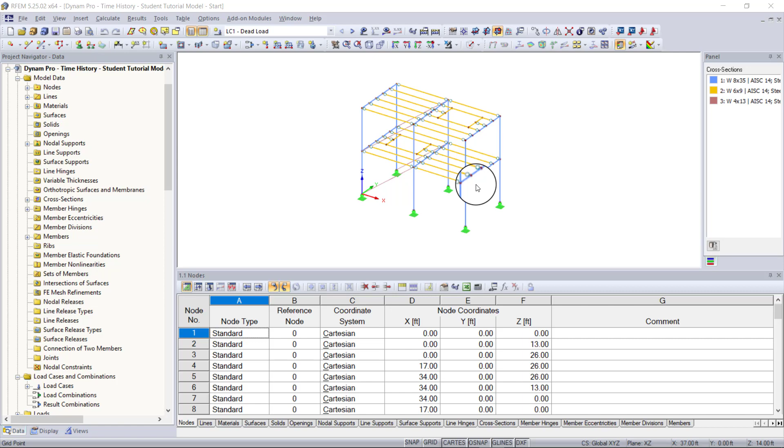So first thing you will see is I have a simple steel frame structure open here. And this is what we are going to be placing our oscillating machine on. And we will be adding in the horizontal and vertical force load cases as well. So now I just want to show you the machine load.

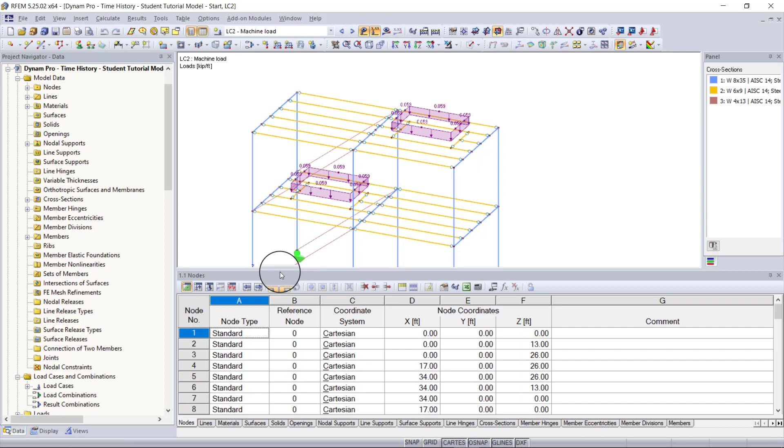Right now we have the dead load open, but if I go to the machine load, you can see where the machine is placed within these openings here. And this is basically just a static force. So now what we need to do is add in the radial forces. So we need to go up here and create a new load case.

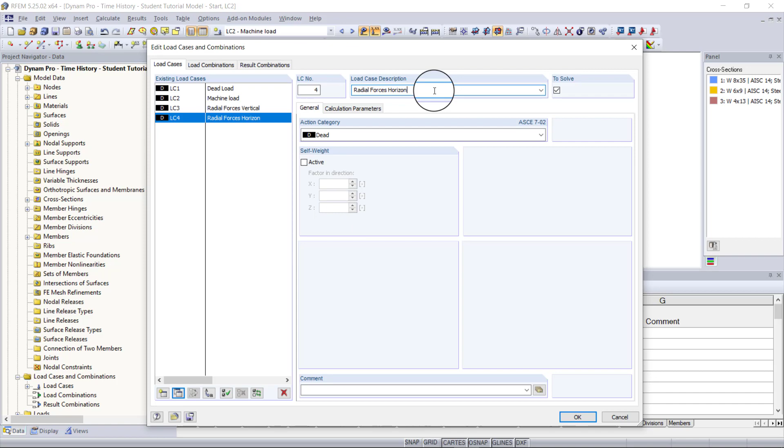The new load case dialog box will pop up, and this first radial force will be our radial forces in the vertical direction. And then we just need to create a copy of this and have a load case specifically for our radial forces in the horizontal direction. So we'll click OK. Now what we can do is we can create our vertical radial forces.

So what we need to do is go up to new member load. And then we can create our new member load, and this is going to be a force uniform and in the Z direction. And then we're going to enter a magnitude of 0.05 kip per feet. Click OK. And now we can just add in the forces along the perimeter of this opening where our machine is located.

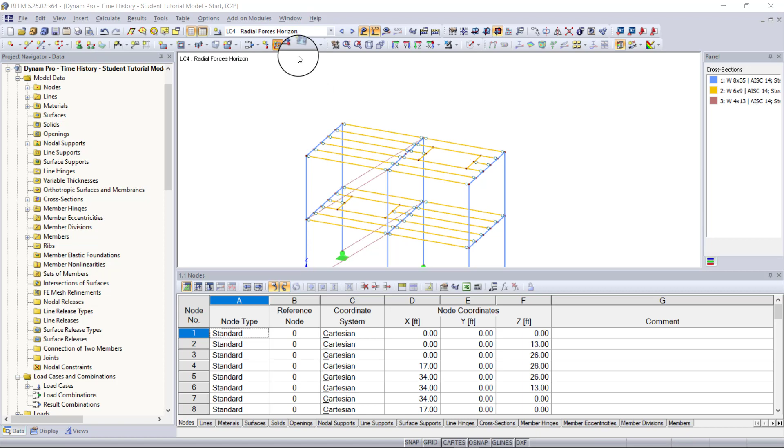And now all we need to do is do the same thing for our horizontal forces. So we'll go to the horizontal load case and create a new member load. And instead of being in the vertical direction, this is going to be in the X direction. And this is going to be the same magnitude, so 0.05 kip per feet. And so now we just need to add in this load.

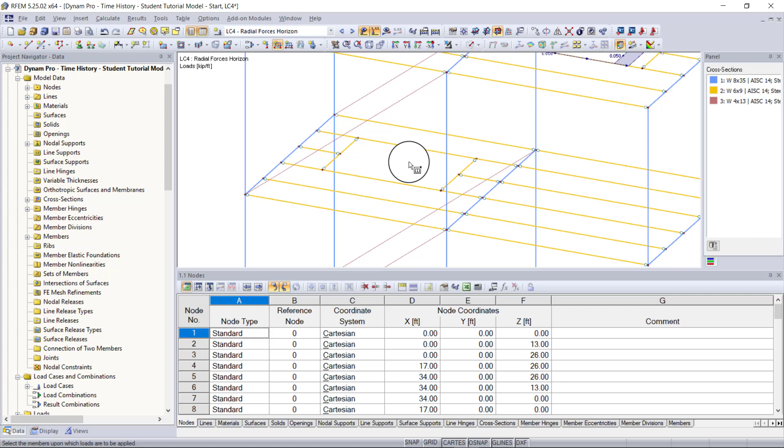And we can do the same thing for our opening down in the bottom here. And now we have both of our horizontal forces and our vertical forces. So now that we have our forces for our machine, we can go into our project navigator on the left-hand side here and go down to add-on modules, and then we can double-click on RF-DYNAM Pro Dynamic Analysis.

So now the first thing we want to do once we have the RF-DYNAM Pro add-on module open is we want to activate natural vibrations and our mass combinations.

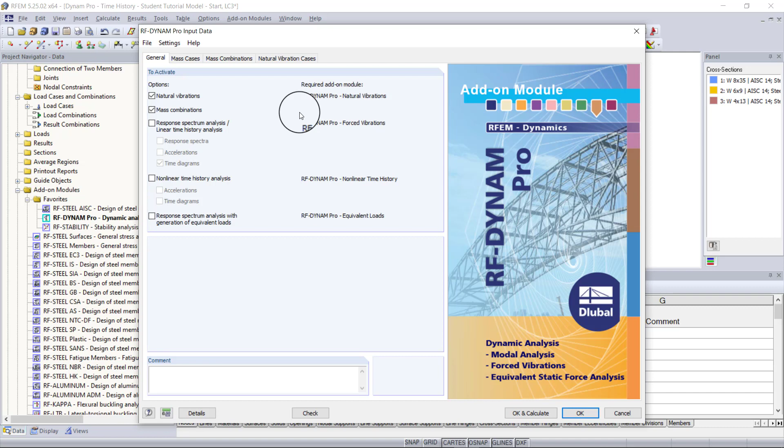So under mass cases, we want to create two mass cases, one for our machine load and one for our dead load. So we'll just make this first mass case our dead load. And since we're already taking self-weight into account in RFEM, we're going to turn off self-weight. And then we're going to check off the option to take the force components from our LC1, our dead load case.

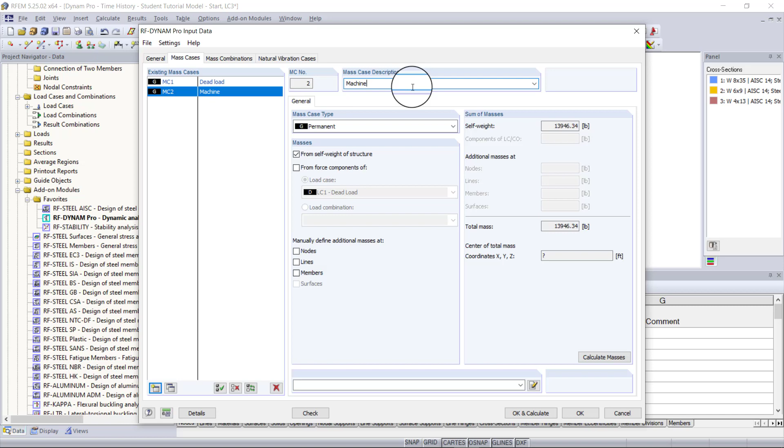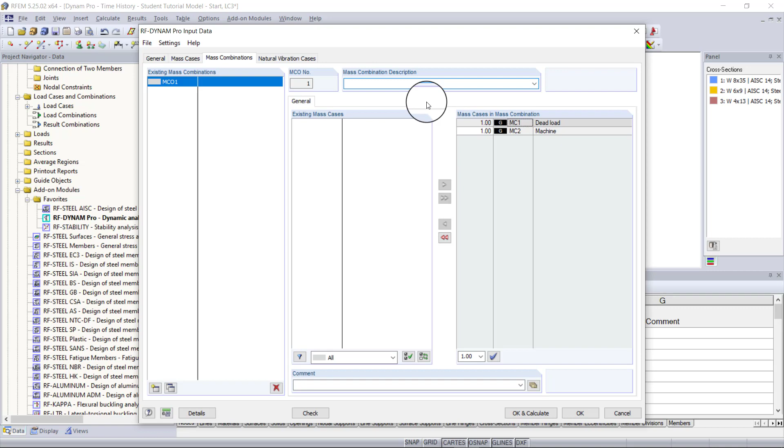And so now all we need to do is just make another mass case, and this one will be for the machine. And we're going to uncheck from self-weight structure and from force components, and then we're going to choose our load case machine. Now under mass combinations, we just want to combine both of our dead mass case and our machine mass case over. So we can highlight both of these, move them over, and then we can just name this mass case 1 and leave it blank.

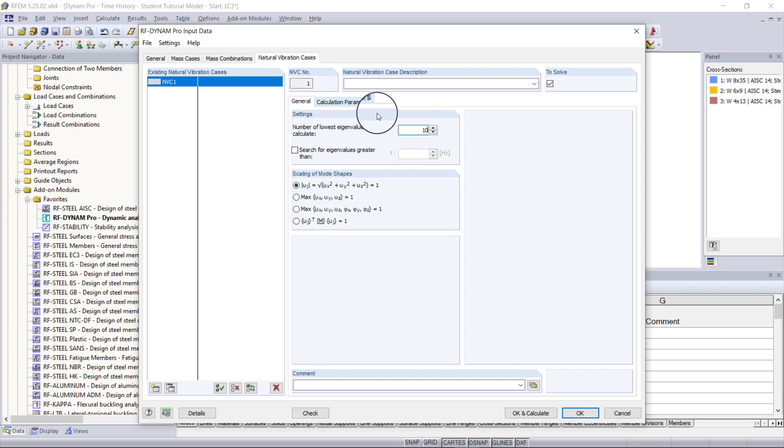Next, under our natural vibrations case tab here, under our general tab, we want to tell the program to run 10 eigenmodes. And then we can leave our scaling of mode shapes equation the same here. Then under calculation parameters, we want to choose the acting masses from our mass combination.

And then we are going to keep all three directions activated. And then we just want to keep our diagonal matrix and translational degrees of freedom. We'll keep the method for solving our eigenvalues as default as the Lanczos solver. And then we don't want to take any stiffness modifications into consideration. So now what we need to do is hit OK and calculate.

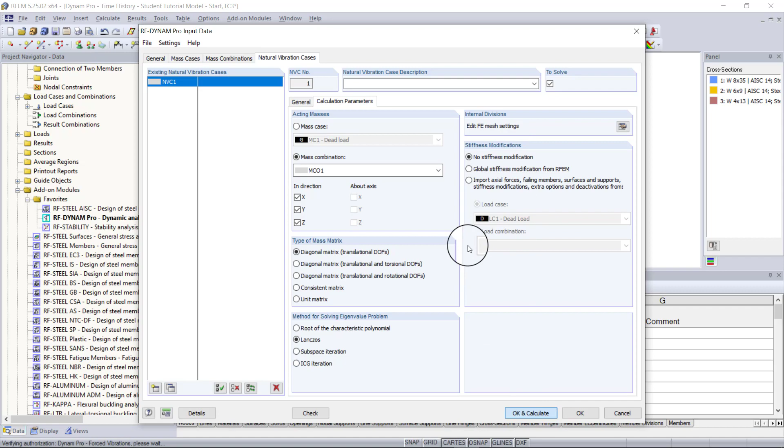And now back in RFEM, we can take a look at our results. So we want to go into table 5 and take a look at our effective modal mass factors and scroll down. And you can see that we have our total mass participation of 99% in the y direction and 69% in the x direction and 31% in the z direction.

Now it's not necessary to get 90% mass participation in each direction, so we don't really need to worry about that. We do need to find the modes with the greatest results in the x direction and the z direction because these are the directions of our loading. So if we go into the x column here, you can see that mode 7 is one of our most important mode shapes, and then in the z column you can see that mode 10 is our other most important mode shape.

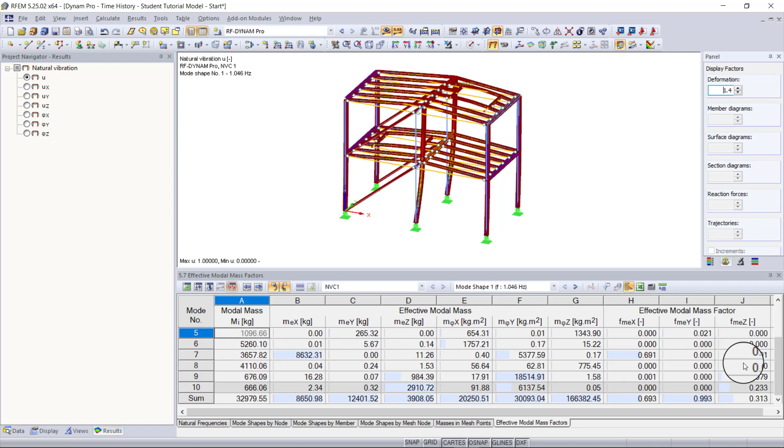And now we want to take a look at our natural frequencies as well. So we can see that our maximum natural frequency in mode 10 is about 37 radians per second. And now we can go back into the RF-DYNAM Pro module and activate our response spectrum analysis or linear time history analysis module, forced vibrations, and then we would just want to activate our time diagrams.

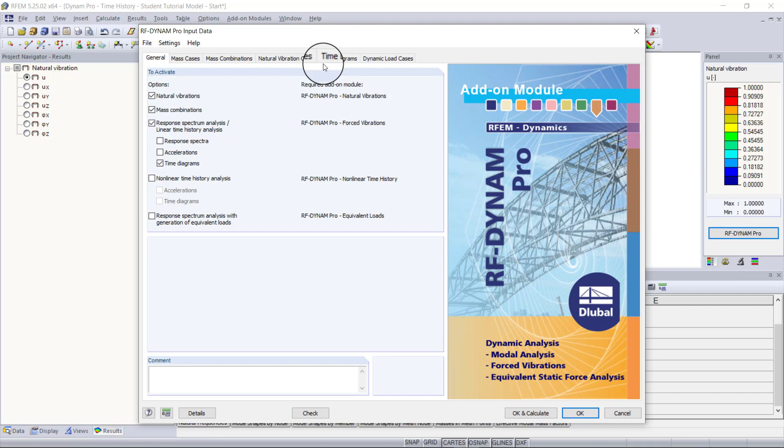So once I do that, you'll see a couple tabs will appear, and in the time diagram tab, you will see a couple options listed here. So our options are either transient, periodic, or function. So transient is only for a linear time diagram, and so you have to enter your time steps manually, so in seconds and then the multiplier. And you can import and export this from Excel.

Then periodic, this is the option we'll be using for today. And then a function, as you may guess, is you can enter a function and you can have it calculate your time steps for you based on the function and the step size you choose along with the maximum time.

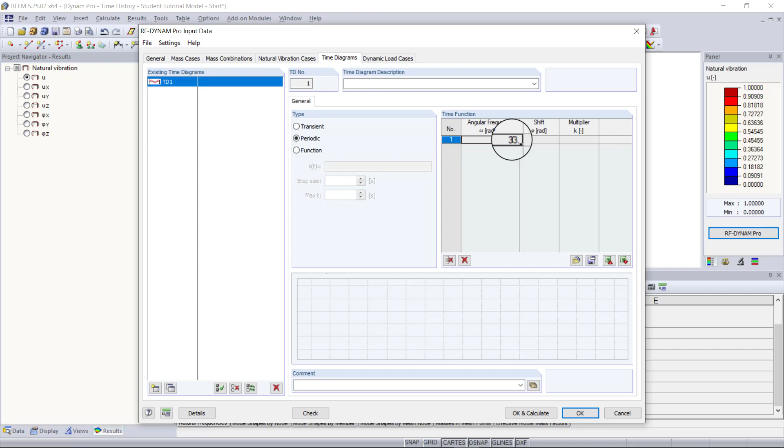So like I said, we're going to be using periodic, and under this option we want to enter our angular frequency of the machine. And for this example today, we're going to assume that our machine runs at 5.34 hertz or 33.51 radians per second. For the shift, we're going to keep this as 0. And then for the multiplier, we're going to keep this as 1.

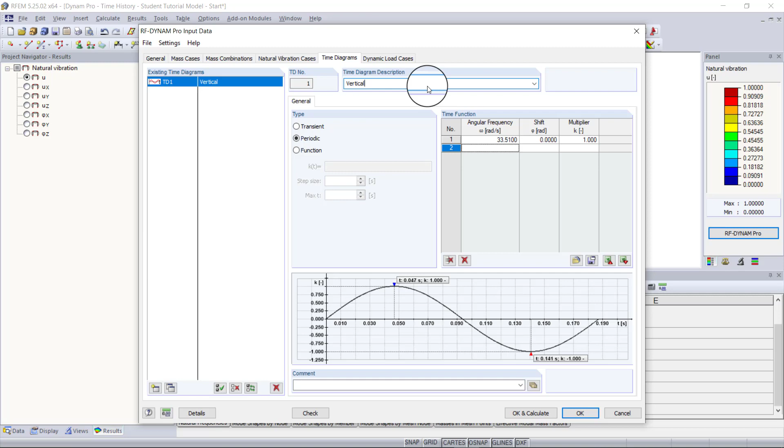And then once I hit enter, you'll see that the program creates a sine function based on the angular frequency entered. And for this time diagram, this is going to be our vertical component. And so at time 0, it's going to have 0 impact, or there will be 0 forces. And then at time 0.047 seconds, we will have an impact or full force of our loading, so 1, and so this will keep going based on this sine curve.

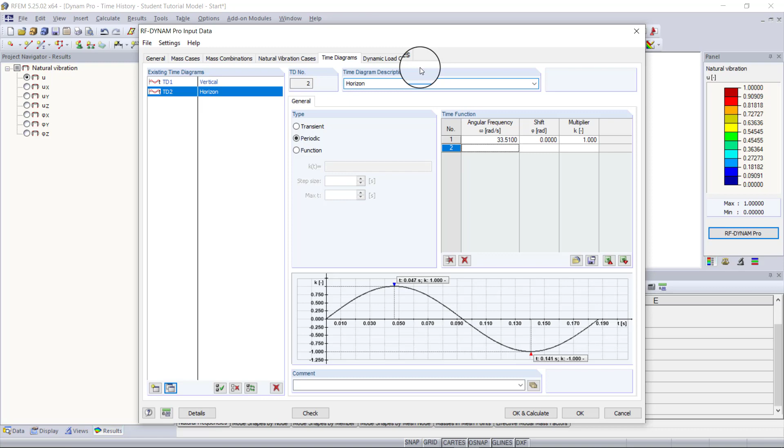So now we have to enter a time diagram that's similar but not the same, so we want to make one copy of this, and this time diagram is going to be for our horizontal components. We'll keep it as periodic, and then all we need to do is shift this time diagram by a value of half of pi, so this equals 1.5708. If I hit enter, now you'll see that our time diagram has shifted.

And now at time 0, we have full force of a multiplier of 1. And then at time 0.047 seconds, we have no force at all. And so this is how we're going to simulate the radial forces from our machine that's oscillating, with our two vertical and horizontal components here.

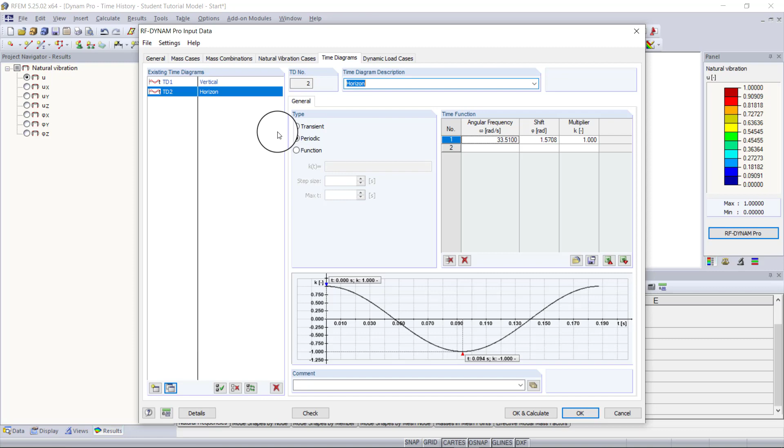So now what we have to do is combine our time diagram with the loads. So we need to go to our dynamic load cases tab, and you can see we only have the time history analysis of time diagrams activated here, because the only module that we activated under our general tab is time diagrams. So everything else will be grayed out.

And then we're going to be using the linear implicit numeric analysis, and this is recommended in most cases because it provides more precise and better results, whereas the linear modal analysis should only really be used for small structures like a cantilever, for example.

So then under the next tab, time history analysis, here we have to combine the load cases with the time diagram. So for our first load case, we're going to choose our vertical radial forces, and then match that up with our vertical time diagram. And then for the second load case, we're going to choose radial forces horizontal, and match that up with our horizontal time diagram.

When it comes to time steps and maximum time, we want to change to something smaller, from 0.1 seconds to something like 0.01 seconds. And you want to think of this kind of like FE mesh, because you'll see later how this can affect the accuracy of your results. And then the next thing we want to enter is our maximum time, and we'll enter 15 seconds for this.

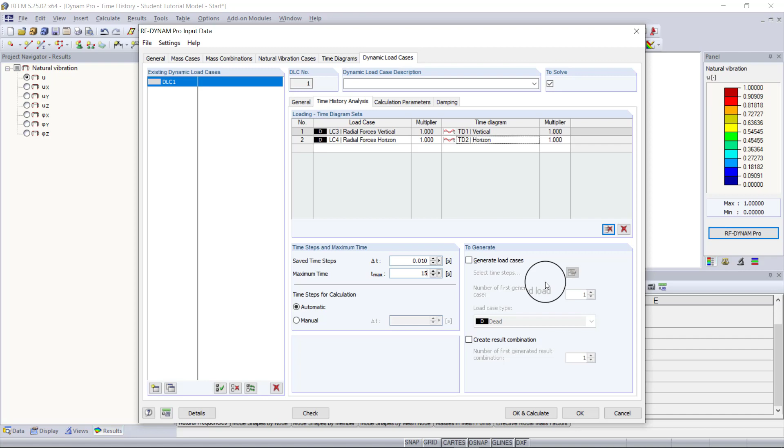You can then use the generate settings over here to generate load cases and result combinations. We don't need this right now, but if you wanted to see the results later and combine them with other static loads so you can do some design work, you can do that here. This is just something that is handy if you wanted to mix static loads with the loads generated from this time diagram. The next tab we want to go into is our calculation parameters.

And so here we want to do the same input process just like our natural vibrations analysis. This is because the linear implicit numeric analysis does not use our natural vibrations case 1 that we created. And you can see if I go back to general that this option to choose it is grayed out. But if we chose the linear modal analysis, we could choose this from here.

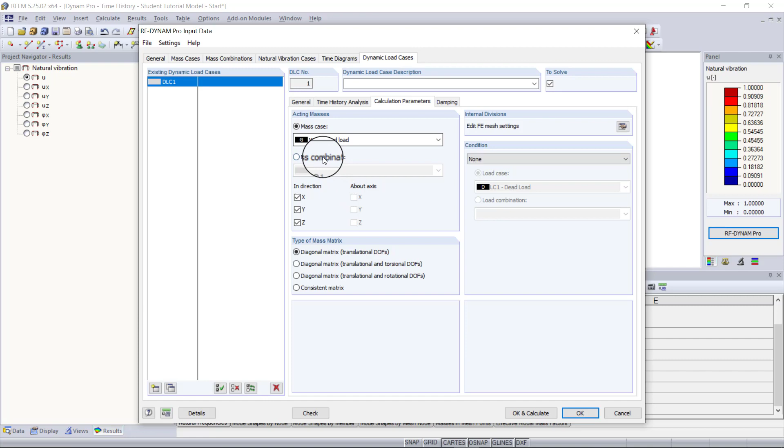So what we need to do under calculation parameters is basically just set the same parameters as we did for our natural vibrations case 1. So we can choose our mass case and we can choose in all directions. And then our type of mass matrix will just be in the translational degrees of freedom. Then when it comes to the condition, we're not going to use any conditions.

Then the last tab we need to go through is damping. So this is the last major setting that we need to look at. What we need to do here is just enter our damping coefficients for Rayleigh damping. We can't use Lehr's damping for our numeric analysis. So we can go into this tool here that converts Lehr's damping into Rayleigh damping. And this is the reason why we ran our natural vibrations analysis, because we needed to find the dominant mode shapes and take the natural frequencies from these.

So we can click on this small tool here and enter our frequencies from the most important mode shapes, which were 7 and 10. So 7 was for the X direction and that was 33.67 radians per second. And since we're using a steel structure, we'll just assume that for steel, the damping coefficient is going to be 0.02

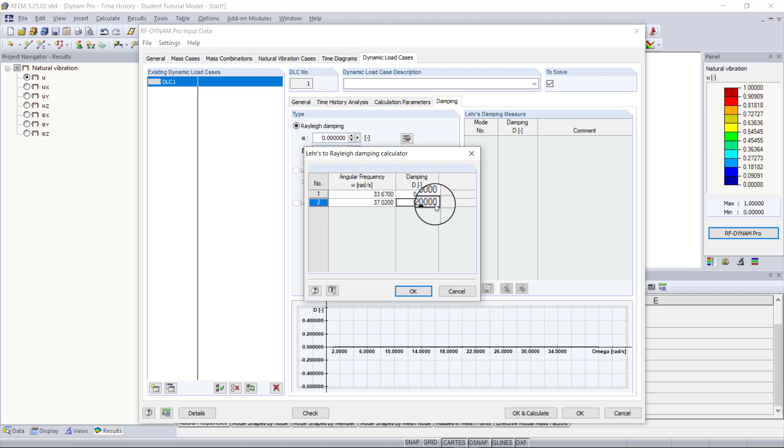or 2%. And then our other mode shape was in the Z direction, and that was mode shape 10, with a frequency of 37.02 radians per second. And then again, we're just going to enter 0.02 for our damping coefficient. So now we can click OK, and you can see that our coefficients, alpha and beta, for Rayleigh damping were calculated automatically. And you'll see the function appear down below, and those dominant frequencies we entered are damped by a factor of 2%.

So now that was basically the last pieces of data that we needed to enter to complete the input data for our linear time history analysis. So now all we need to do is hit OK and calculate, and then we will see the results. And this is the end of part 1.